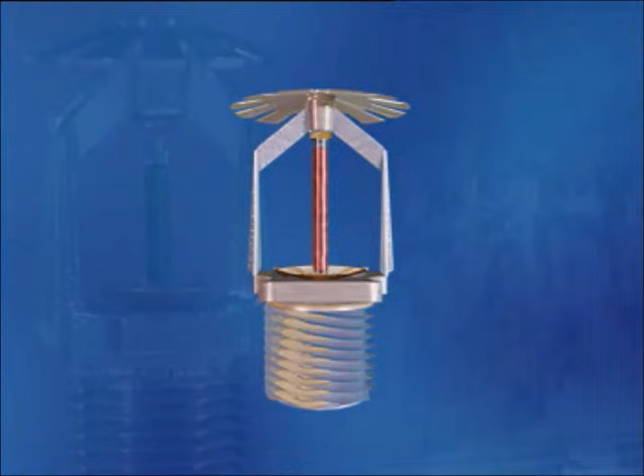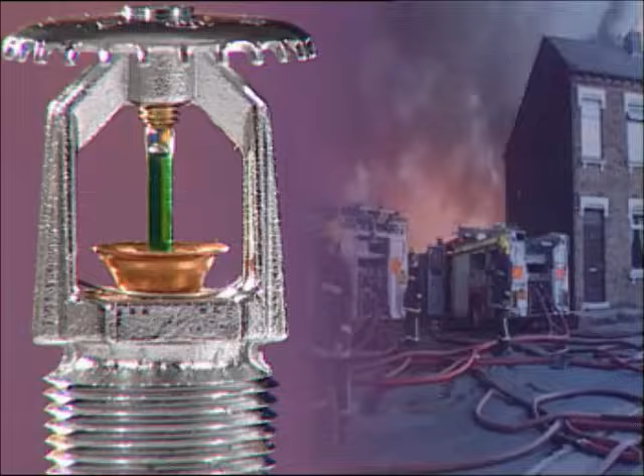Fire sprinkler systems were invented over 120 years ago. Since then, several hundred million sprinkler heads have been installed throughout the world. In that time, they've effectively protected thousands of buildings, helped to prevent the financial collapse of numerous businesses, saved countless lives, prevented innumerable burn injuries, and protected the environment from catastrophic fire-related pollution. They're universally acknowledged as the most effective first line of attack against fire.

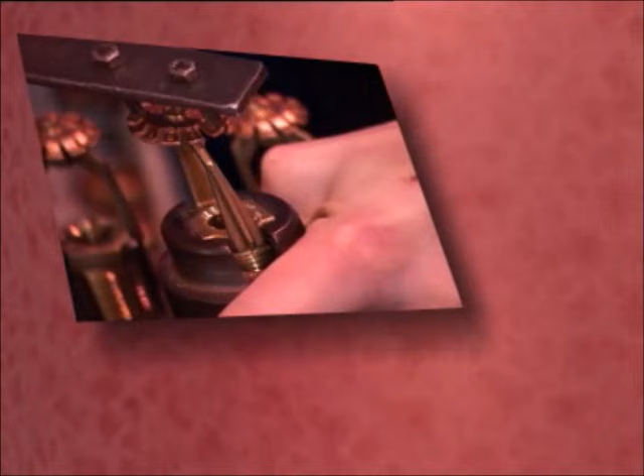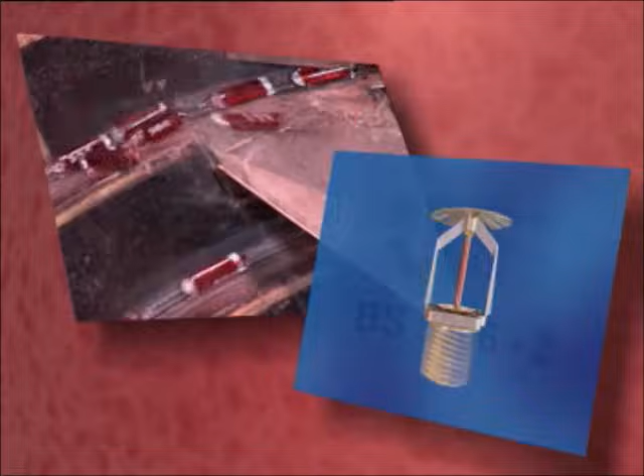The world's first rules for the design and installation of automatic fire sprinklers were written in the UK by John Wormald in 1885. Fire sprinkler systems in the UK are generally designed in accordance with British Standard 5306 Part 2 and, in some instances, Loss Prevention Council (LPC) rules for automatic sprinklers. American rules may sometimes be used, being Factory Mutual or National Fire Protection Association.

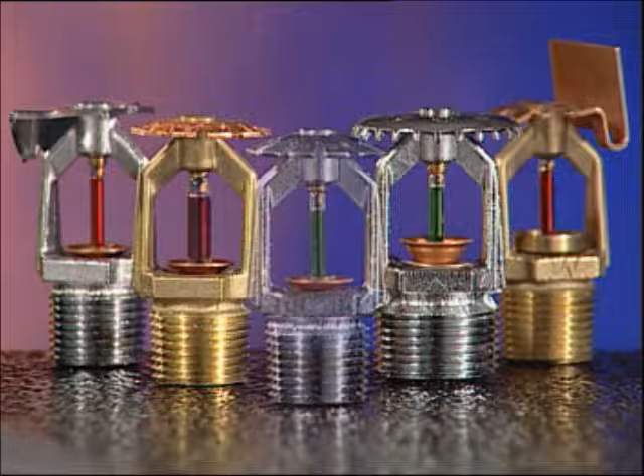Sprinklers are designed to cope with the fire risk presented by each individual building and may also be specifically configured to save lives. Water still remains the most effective firefighting medium available. Sprinklers will deliver water right into the heart of a fire during its early stages through a specially designed sprinkler head. Sprinkler heads are unique. They automatically detect a fire, discharge water right into the seat of the blaze, and operate a local alarm. They can also operate a remote alarm to alert the fire brigade or other emergency centre.

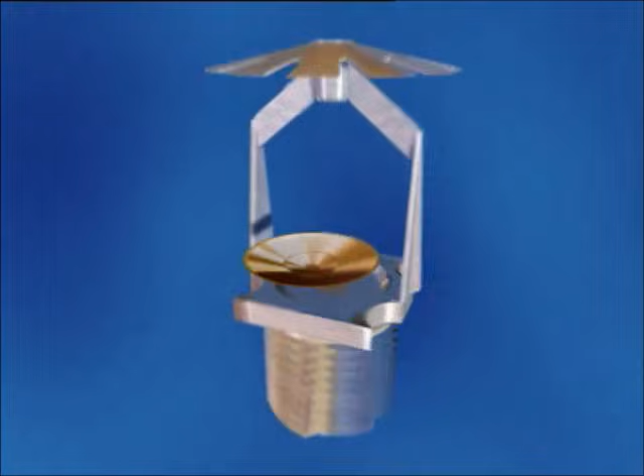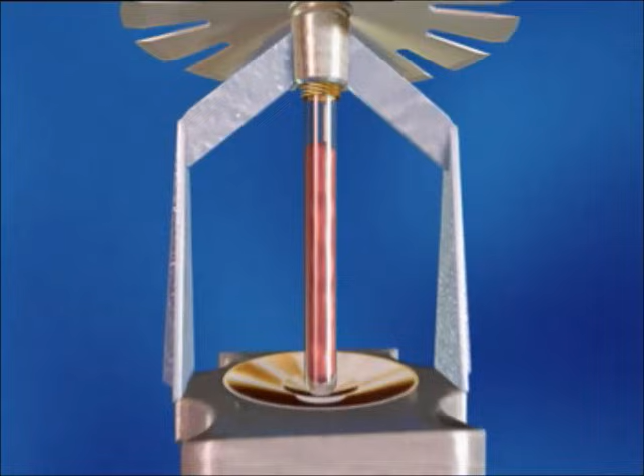A typical sprinkler head comprises a threaded body to connect to pipework, with a valve seal to hold back the water. The valve seal is retained by a glass bulb which contains a liquid that has a high coefficient of expansion. A small measured quantity of vapour remains trapped when the bulb is hermetically sealed.

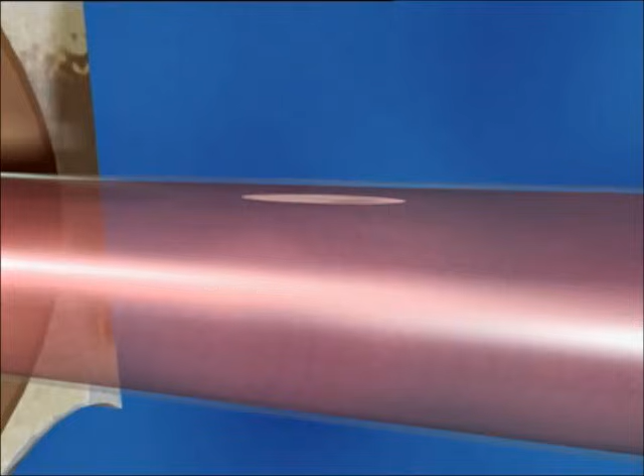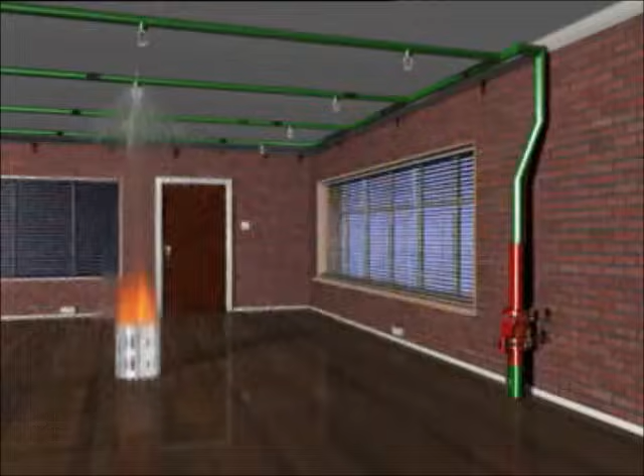When the liquid expands under the influence of heat from a fire, pressure in the bulb rises until the vapour is compressed. Further increases in temperature cause a rapid build-up of pressure sufficient to shatter the bulb, releasing the valve seal and allowing the water to flow onto a water distribution deflector. This results in an even distribution of water droplets in a predetermined pattern over the fire. Sprinkler heads are available in a variety of operating temperatures, which are identified by the color of the bulb.

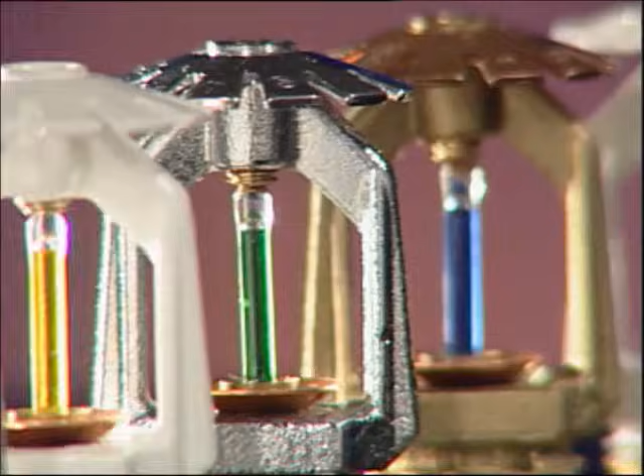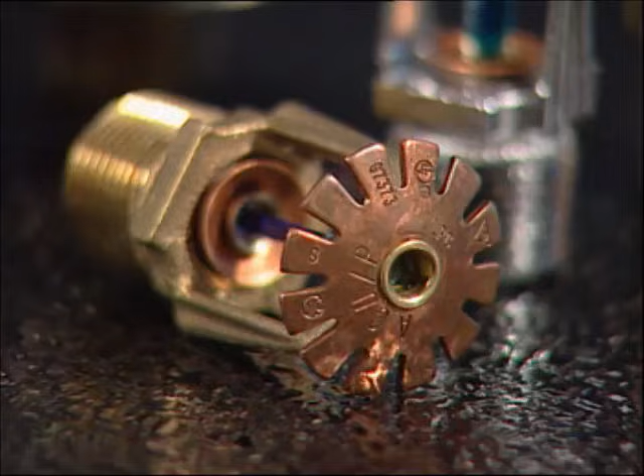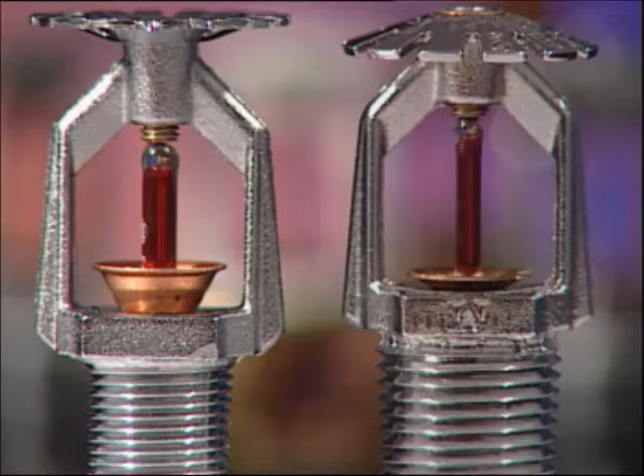The specifier has a vast array of sprinkler heads available to him. Each type of head is designed to cope with different fire risks, different operating temperatures, and different operational requirements. The British Standard defines fire risks as light hazard, ordinary hazard, or extra high hazard. Generally, as the hazard increases, so does the water discharge or discharge density.

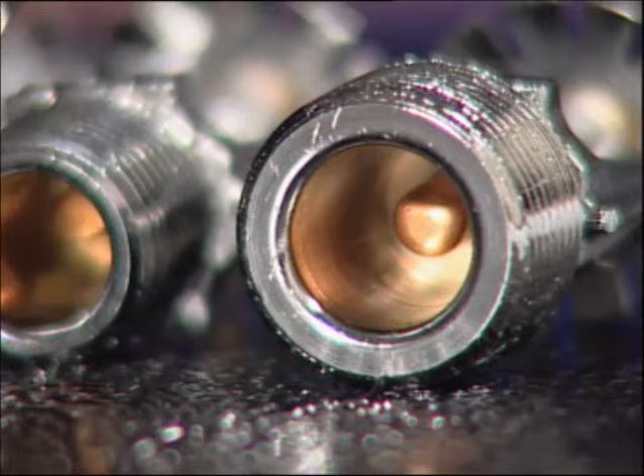Conventional sprinklers can be mounted in either the upright or pendant position, with a deflector designed to spray a proportion of the water discharged onto the surface of the ceiling. Spray sprinklers in upright or pendant positions are used for applications where all the water needs to be discharged downwards.

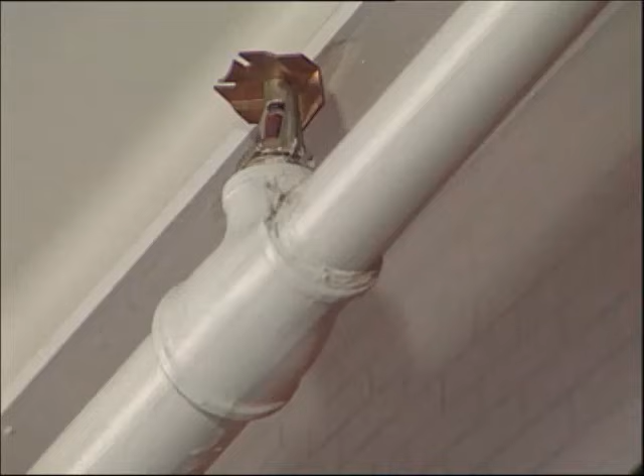Sidewall sprinklers are primarily used to keep ceilings clear of pipework for aesthetic reasons or to avoid having to disturb existing ceilings when installing. Each sprinkler protects up to 17 square meters in light hazard fire risks and 9 square meters in ordinary hazard fire risks. Sidewall sprinklers with extended coverage are specifically designed to give an extended coverage of water distribution, with one sprinkler able to protect an area of up to 21 square meters. This type of sprinkler must have a quick response bulb.

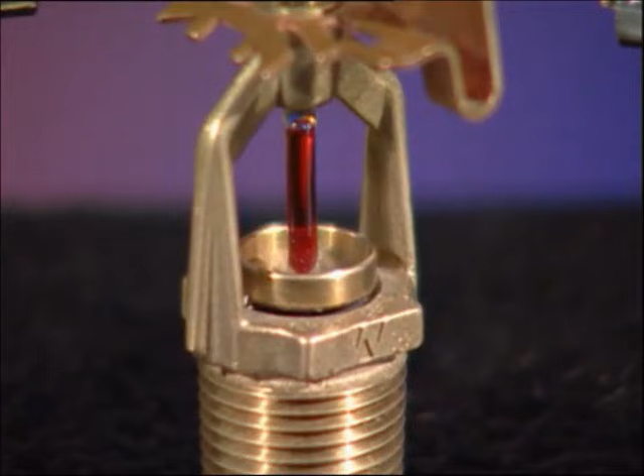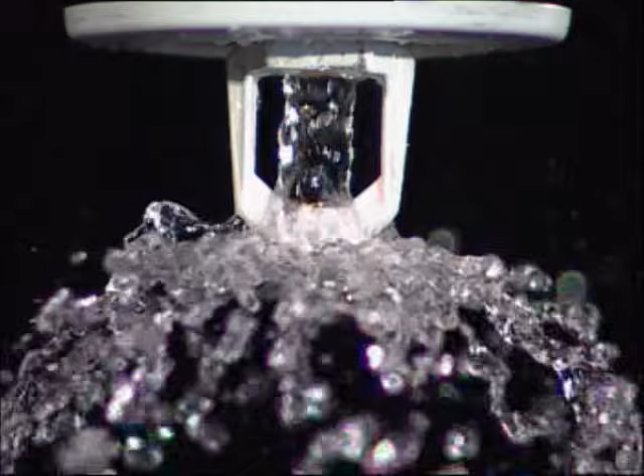In a fire, few deaths result from direct contact with flames. The greatest threat comes from inhalation of the products of combustion, such as carbon monoxide, hydrogen cyanide, hydrogen chloride, other toxic gases, and the associated heat. The reaction time of quick response sprinklers minimizes the life-threatening levels of toxic gases and temperatures. In many environments, there are people who cannot escape without assistance, such as in hospitals or homes for the elderly. Quick response sprinklers provide valuable time for those in charge to assist their escape.

A sprinkler head is connected to a water supply via a network of pipes fed throughout the building. The area protected by each sprinkler head can vary from 9 square meters to 21 square meters depending on the fire risk. The pipework is hydraulically designed to ensure the correct flow and pressure of water is maintained at each sprinkler head. The water supply to the system can be fed from the town main for light to medium fire risks, such as residential, offices, hotels, and light manufacturing and commercial occupancies. For high fire risk areas, such as heavy manufacturing and warehouse storage, a pumped supply from a water storage tank or reservoir is normally necessary.

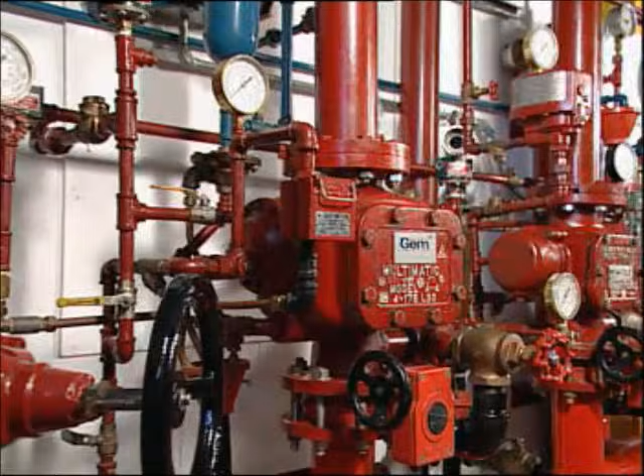The design requirements are specified in the British Standard BS 5306 Part 2 and LPC, FM or NFPA design rules. A control and alarm valve automatically delivers the flow of water to the sprinkler heads. There are generally 5 types of sprinkler system that all require different valve arrangements.

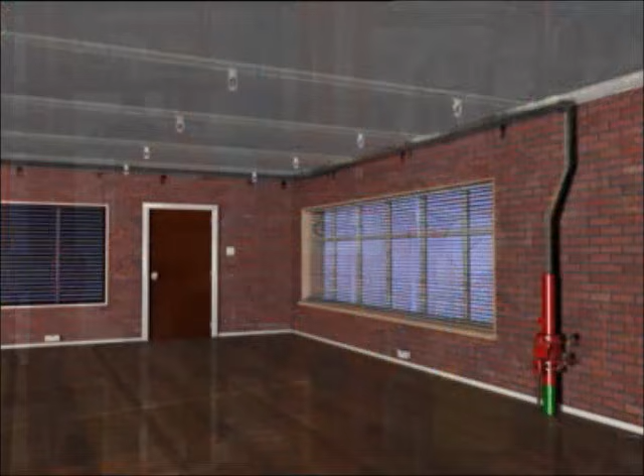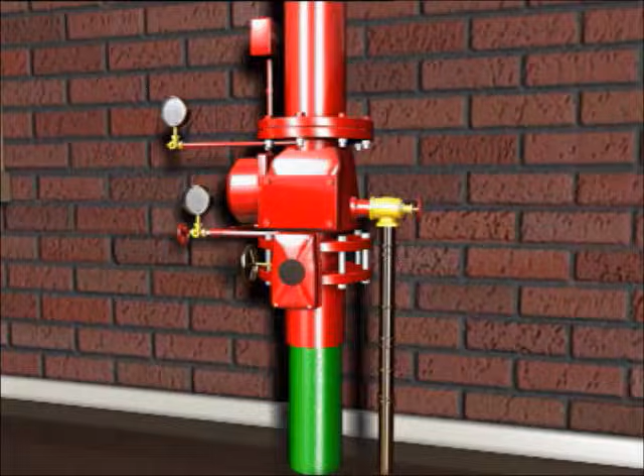A wet system is where the pipework is permanently charged with water and used to protect premises where temperatures are unlikely to fall below freezing point. Where the ambient temperature may fall or be below freezing point, the presence of static water in the sprinkler pipes is clearly undesirable. In this situation, a dry system can be installed in which the pipework is charged with compressed air. When a sprinkler operates, the compressed air is released and the control valve opens, allowing water to flow into the pipework and to discharge from the operated sprinkler heads.

An alternate wet and dry system, as the name implies, allows the system pipework to be alternately charged with water in summer and with air in winter, when there is a risk that the ambient room temperature can fall below freezing.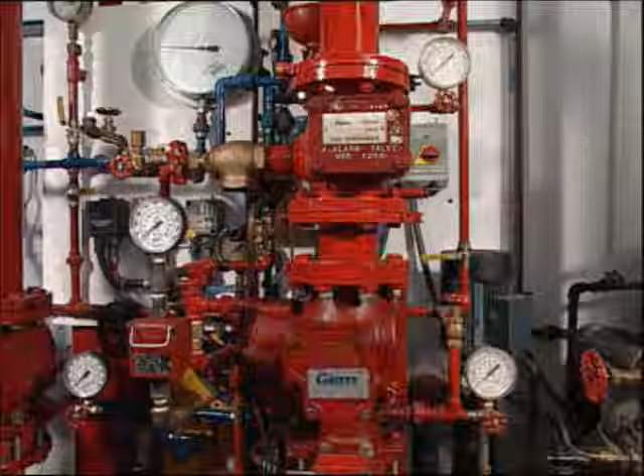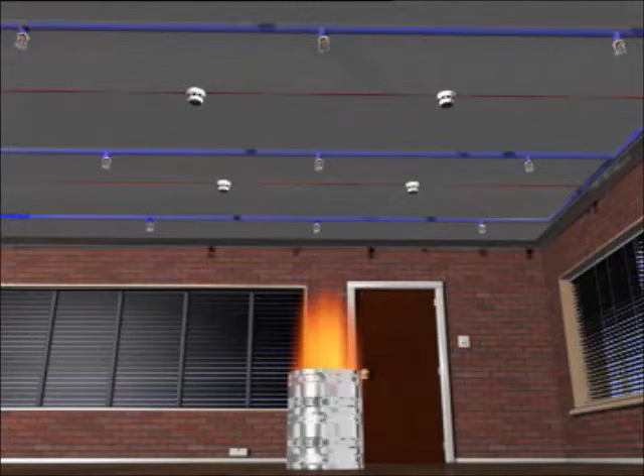Pre-action systems are comprised of a standard sprinkler system and an independent electrical system of heat or smoke detectors installed in the same areas as the sprinklers. On receipt of a signal from 2 or more detectors, the main control panel automatically opens the control valve, allowing water to flow into the sprinkler pipework. Water is only discharged when the individual sprinkler heads reach their operating temperature. Any physical damage to a sprinkler in a non-fire situation will not result in water discharge, but will cause both visual and audible alarms to be raised at the main control panel only.

A deluge system, unlike any other typical sprinkler system, is designed specifically for high-hazard applications with fast fire growth potential. The deluge valve is actuated by a separate detection system responding to a fire. This brings a large number of open sprinklers into action simultaneously throughout the protected area.

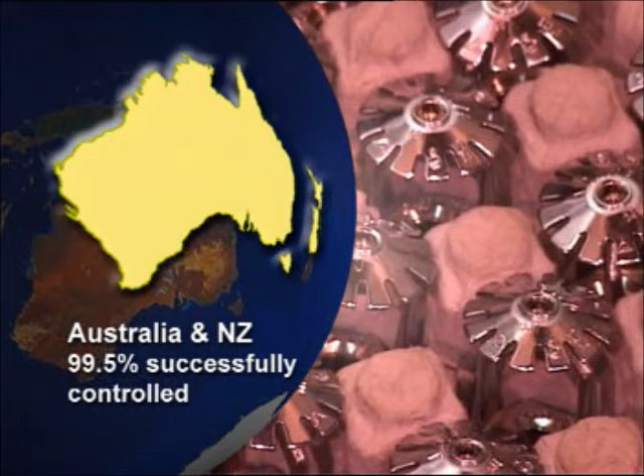The successful performance of sprinkler systems has been detailed in records from across the world, paying testament to their outstanding reliability and effectiveness. In Australia and New Zealand, where it's a requirement that all fires must be reported, records reveal that over a 100-year period, sprinklers successfully controlled 99.5% of fires in sprinklered premises. Statistics collated in Europe over the last decade are remarkably similar, showing that in fully sprinklered premises, 99% of all fires have been controlled by the sprinkler system.

The reason sprinklers are so effective is because they attack the seat of the fire before it has time to grow and spread. There's no excessive use of water. In Germany, for example, 86% of fires in sprinklered locations have been controlled by 5 or fewer heads. In the UK, it's reported that of the fires in sprinkler-protected buildings over a 10-year period, almost half were controlled by 1 or 2 sprinkler heads only.

Fire brigades, local government authorities and politicians alike have all seized upon these statistics. This has generated numerous campaigns for sprinklers to be installed in applications that could only ever have been dreamt about when sprinklers were first commercially launched over 120 years ago. That's because sprinklers are unique. They not only detect a fire and raise an alarm, they operate to control it and in many cases extinguish the fire before the arrival of the fire brigade. Only the sprinkler heads closest to the fire operate.

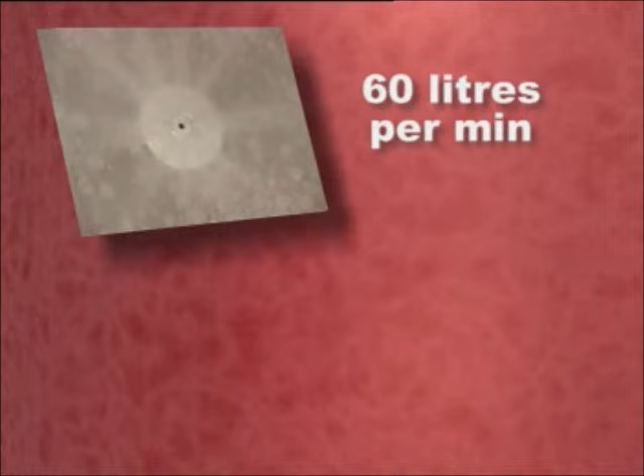Water is discharged by a sprinkler directly onto a fire at a rate of a minimum of 60 litres per minute, in comparison with an unsprinklered building where the fire brigade using only 1 fire hose could discharge 500 litres per minute. The fire will also be much larger as it will have grown for at least 10 minutes before the fire brigade arrive, so the likelihood is that more than one hose would be used.

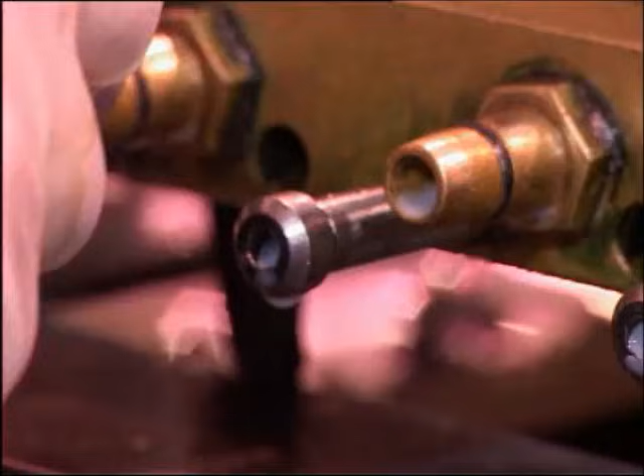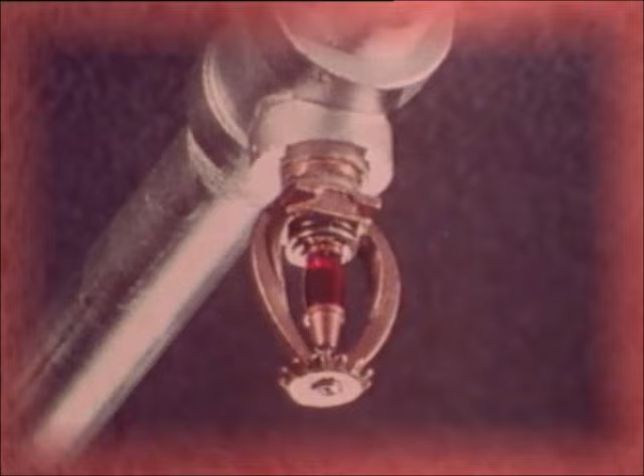Worldwide research shows that of the 40 million sprinklers installed every year, only 2 may operate accidentally. This is because every head is individually tested before leaving the manufacturer. Sprinklers are economical to install. For example, in the case of office blocks and hotels, the sprinkler system would cost about the same to install as a quality carpet for the equivalent area. Sprinkler systems will have a lifespan of at least 25 years, probably 50 years. Some systems are still in use today that are over 120 years old.

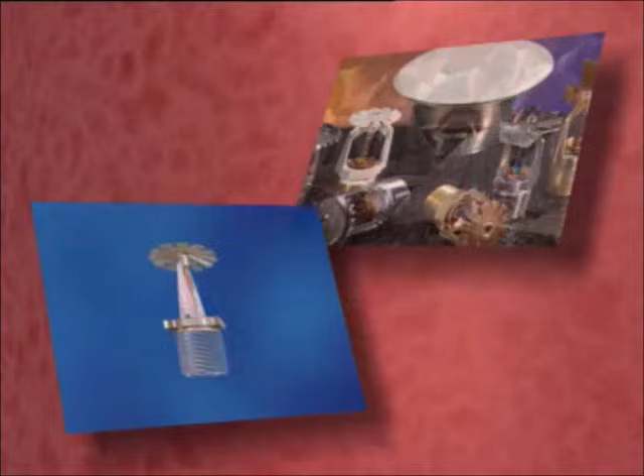The threat from fire will never change. It will always be with us, endangering life, property, and the environment we live in. Fire sprinklers will protect us and future generations. Fire sprinklers. Protection for life.